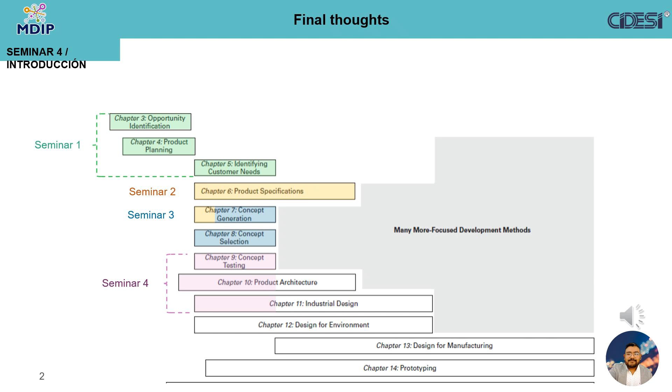Without a doubt, we've come a long way through these four seminars. Between successes and failures, we've embraced the methodology proposed by Ulrich and Eppinger for new product development. Each of these seminars has provided us with lessons and paradigm shifts that have allowed us to conceptualize and refine our concept, transforming an initial idea into something much more solid and meaningful. Throughout this presentation, we will address our interest in the selected opportunity as well as a brief summary of the results of the seminars that allowed us to arrive at our final concept.

In Mexican households with an average of 4 inhabitants, it is estimated that around 150 liters of water are wasted per day due to bad habits, such as leaving the water running while waiting in the shower or during activities such as washing dishes and clothes.

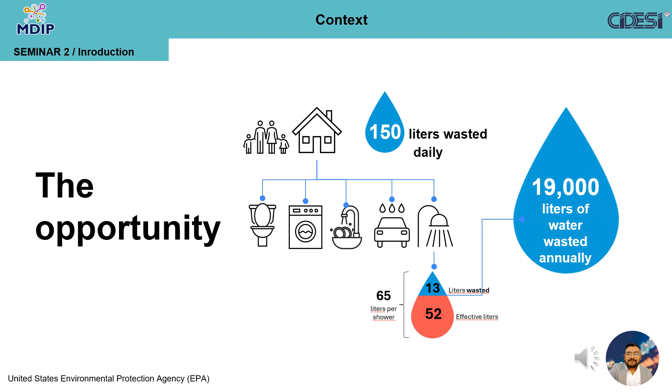According to the EPA, approximately 20% of the water used in a shower is wasted while the user waits for it to reach the proper temperature. Since an average shower consumes about 65 liters of water, this 20% is equivalent to about 13 liters per shower. In a household of 4 people, this waste could add up to almost 19,000 liters of water per year.

During Seminar 1, and based on the methodology described in the book on design and development by Ulrich and Eppinger, we were able to establish the mission of our product, which has guided us throughout our development: modernization of the shower system for homes, for installation in the exposed piping of the existing shower system, reducing the time it takes for hot water to flow when opening the faucet to start the shower, reducing water consumption, and offering an efficient, adjustable, and comfortable flow.

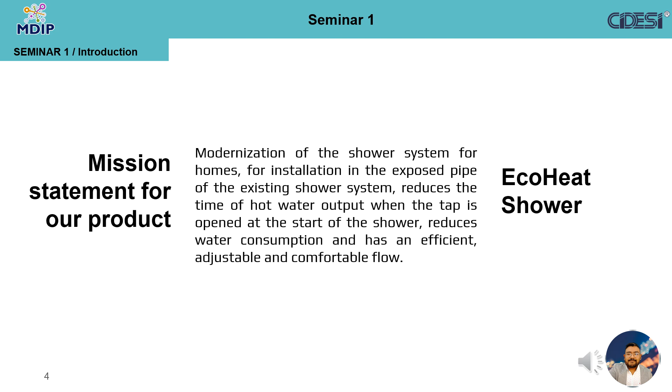We have kept this description in mind throughout the seminars. However, as we will see throughout this presentation, some of our design decisions have slightly deviated from the initial scope.

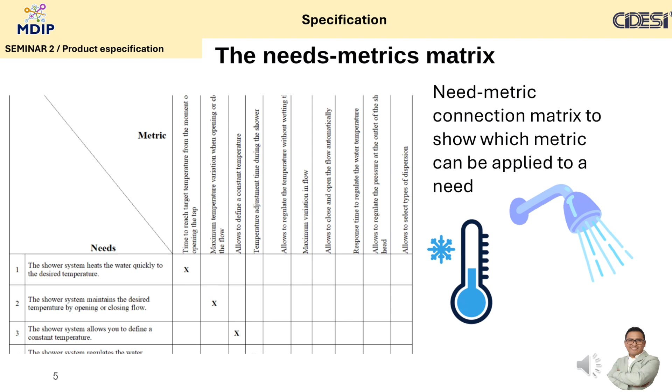In Seminar 2, we defined the final list of needs by assigning each one a level of importance. We also generated the metrics applicable to these needs, for which it was necessary to conduct a study to determine which metrics would be appropriate to validate and certify our product.

At this stage, we conducted research on existing products in the market that could be direct competitors to our project. For this reason, we initially sought to avoid biases by carrying out in-depth research considering different features, functionalities, prices, etc. In this stage, we also compared each product with a list of metrics and needs in order to determine which product was the best in the market and to establish a reference point for our own product.

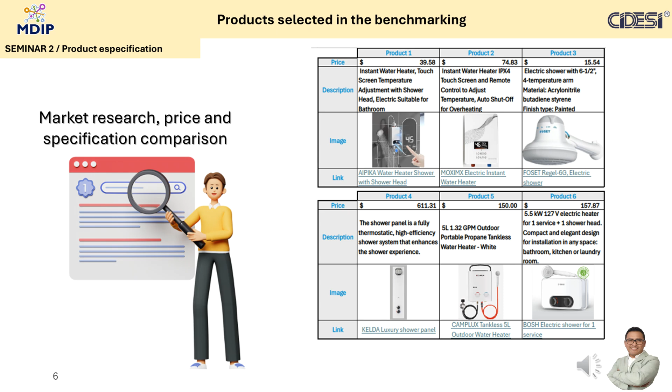In the patent search process, we followed the instructions shared with us by the professors. First, we described the invention. Then we identified the relevant classifications, reviewed the definitions of these classifications, and subsequently carried out the process of searching, selecting, reviewing, and referencing using the CPC. We also conducted the search in Google Patents and Espacenet.

In the search, we identified very interesting patents, and one of them described our problem: avoid wasting cold water before hot water comes out. This process helped us identify both positive and negative aspects, and carrying out the development allowed us to identify opportunities to improve existing developments, avoid risks detected in the developed patents, protect our innovation, gain a visualization of the problems being solved, and most importantly, obtain an overview of how we can meet our clients' needs.

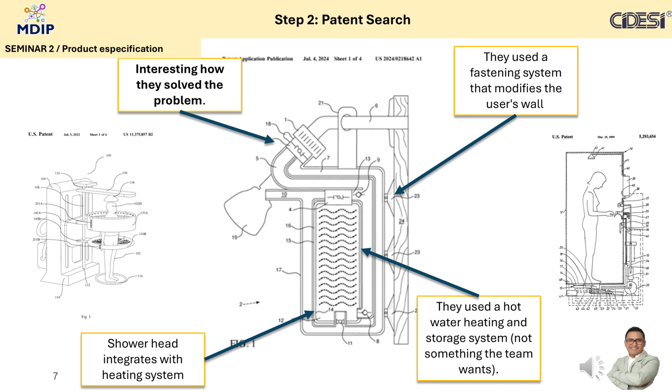Once we obtained the target specifications and defined the marginal and ideal values, we proceeded to carry out the clarify the problem stage. This process was a challenge for us, as it was not very simple to perform with our product. The problem was decomposed into subproblems in such a way that we carried out the three indicated decompositions: functional decomposition, user sequence decomposition, key user needs decomposition.

At the end of this process, we obtained the 4 critical subproblems that would be addressed. This process helped us to visualize the complete product, design and develop each function independently, prioritize functionalities, and establish the logic in the user sequence.

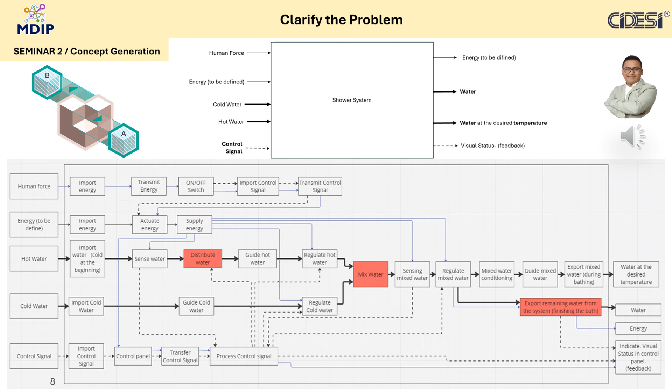These are the critical subproblems we've identified and will address throughout Seminar 3.

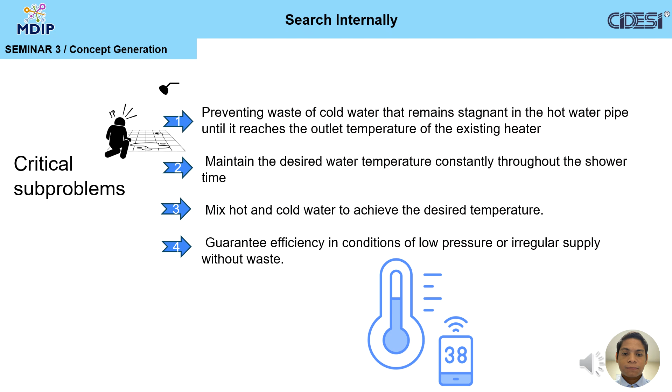We met as a team to conduct an internal search, using our individual and group knowledge of the project to generate ideas. It's important to mention that we sought to be as creative as possible during our brainstorming sessions, tailoring the information to each subproblem.

During this third stage of seminar, an internal search was carried out using different strategies to identify ideas, such as creative role-playing. Some ideas generated in this stage are presented, including intelligent designs incorporating motion sensors and different water mixers.

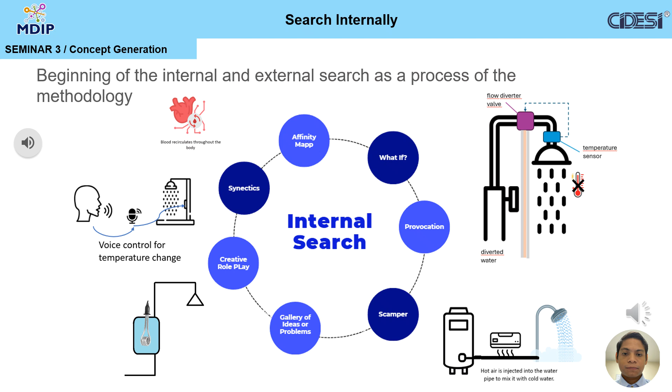The external search was carried out in order to explore what already exists in the market or is in development, such as patents to improve our concept, like the method to empty our system of water over its circulation.

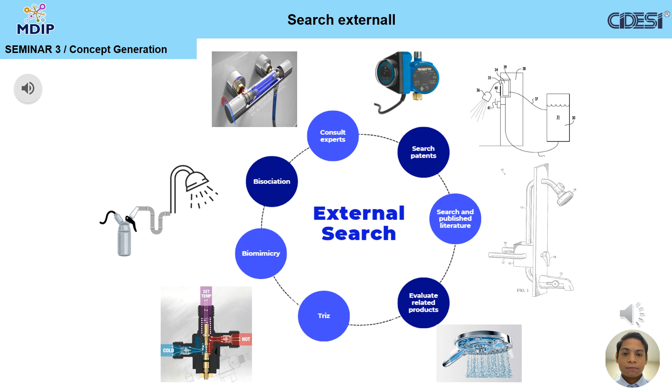In the first stage of Seminar 4, the multi-voting process was carried out within the team to select the final concept. We should highlight that the winner of this multi-voting was different from the last options in Seminar 3, because the previous concepts did not have the necessary potential to move forward.

It is important to mention that the team carried out an evaluation of Concept 7, which had been selected in Seminar 3. By using the mentioned process and analyzing the professors' and thesis advisors' comments, Concept 14 was selected, a system that has a stored water tank, recirculates the water, and uses a thermostatic mixing valve with infrared sensors and automatic pressure pumps to maintain pressure.

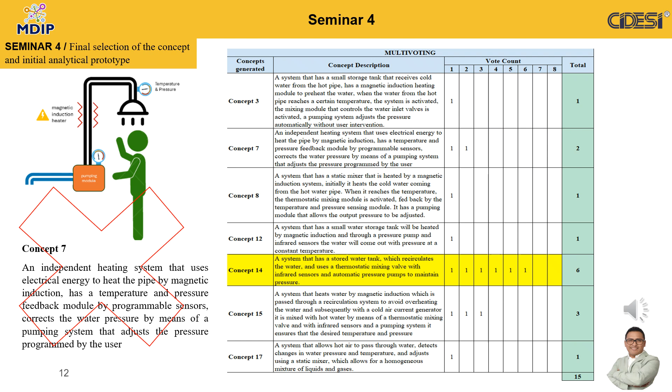It is important to note that this concept was later improved. The selected concept was Concept 14, which already includes a water storage tank to collect the cold water standing in the hot water pipe. This cold water is later pumped to a mixer for recovery, ensuring the tank is always empty and available to temporarily store cold water from the hot water pipe.

It is important to mention that in this process, we also carried out calculations for the tank size, the pump's energy consumption, and the battery's energy consumption and capacity.

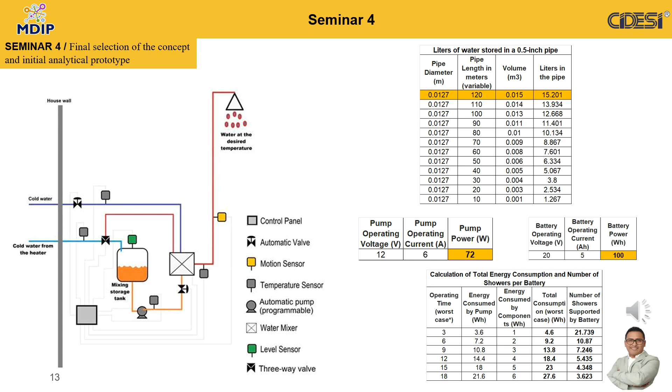The strategic decision to focus on the C segment is based on a precise alignment between the characteristics of this market and the value proposition of our product. We decided to target this segment for reasons such as purchasing power and willingness to invest in added value, appreciation for quality, durability, and design, and interest in innovation, sustainability, and efficiency.

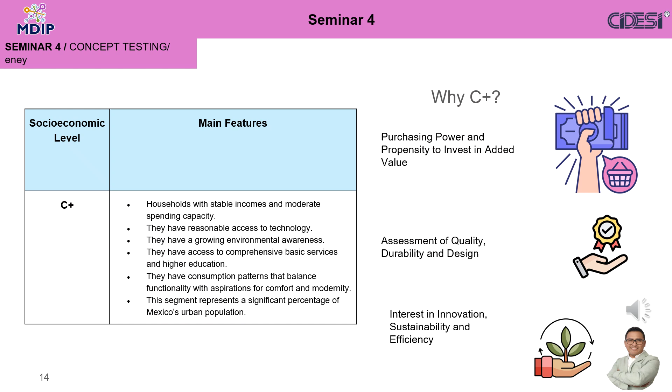In this stage of concept testing, we selected the survey format and decided to conduct it via video conference. We considered the possibility of biases and how to mitigate them. For this reason, we decided to create a concept in SolidWorks and present it to the interviewees.

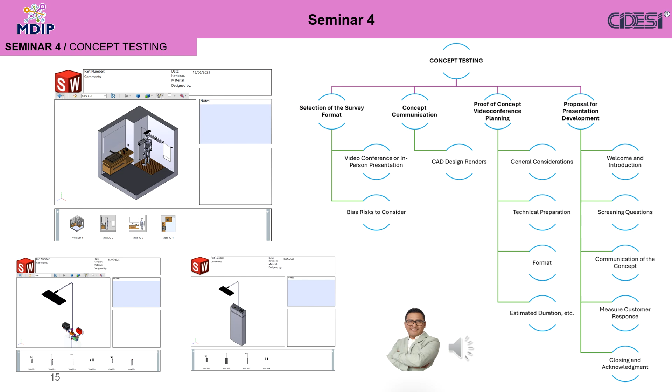Afterward, we developed the plan for the video conference interviews. It is important to mention that these interviews allowed us to gain deeper insight into users' reactions, and their feedback provided us with significant value.

In the following report, we decided to create a YouTube video about the operation of our product and share it with the interviewees. Through Google Forms, we generated a series of questions to obtain more feedback on the concept. It is important to mention that the reception of the video was very positive, and the feedback helped us measure their responses.

Afterward, we measured the users' responses, obtaining very interesting insights such as genuine interest in the product, attraction to water savings, some concerns about the complexity, size, and possible cost of the system, and most importantly, their willingness to change their current system due to the severe water shortage in Mexico. We presented the data and graphs, and in a more visual way, we saw that the greatest interest lies in avoiding water waste.

Moreover, even though the price could be high, it would be compensated by the water savings given the current water crisis.

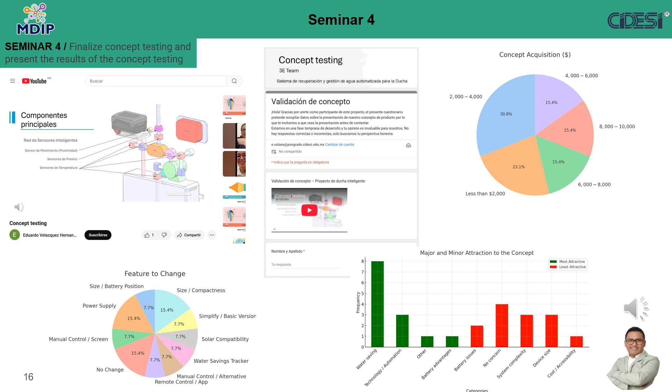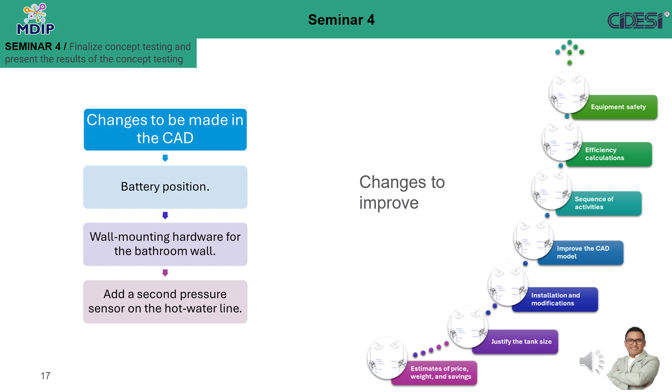Finally, these results represented an opportunity for improvement for us, where in the next steps we would place greater focus. Here are some examples: position and size of the battery, water consumption, mounting hardware to the bathroom wall, adding a second pressure sensor for the hot water line, and temperature level measurement, among others.

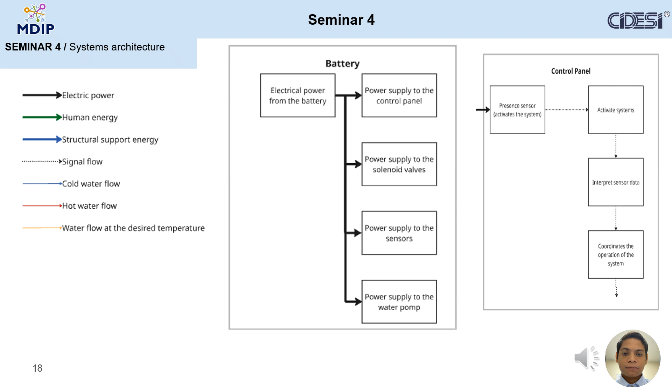During the process of developing the architecture of our shower system, we went through a series of stages that not only allowed us to technically structure our design, but also forced us to deeply reflect on our decisions, correct errors, and learn to interpret the feedback we received. The first step was creating the diagram where we represented the flows of materials, energy, force, and signals. This forced us to understand the system from a functional perspective, rather than simply considering it as a set of components. From there, creating the diagram where elements were grouped into functional subsystems allowed us to more clearly visualize the internal relationships, optimize the system's organization, and anticipate future tasks such as assembly, maintenance, and validation.

As a fundamental part of the development of our system, a detailed bill of materials was created. This list not only identifies each of the components required for proper operation, but also allows for precise control of costs, technical compatibility, and manufacturability. The importance of this list lies in the selection of materials based on the following criteria: thermal and corrosion resistance, mechanical compatibility between components, availability in the domestic market, cost-benefit ratio, and overall material efficiency.

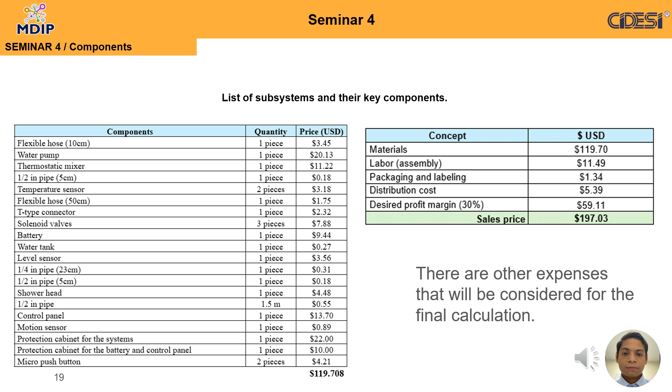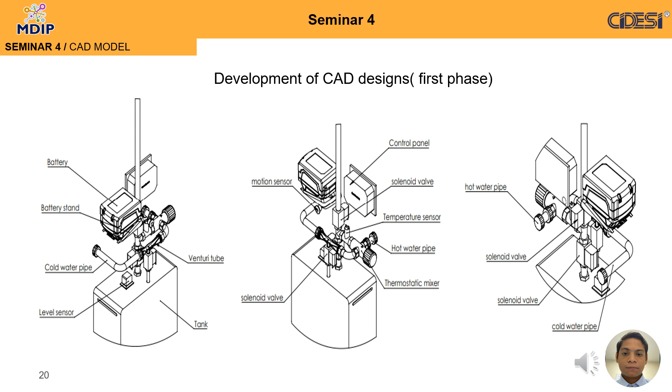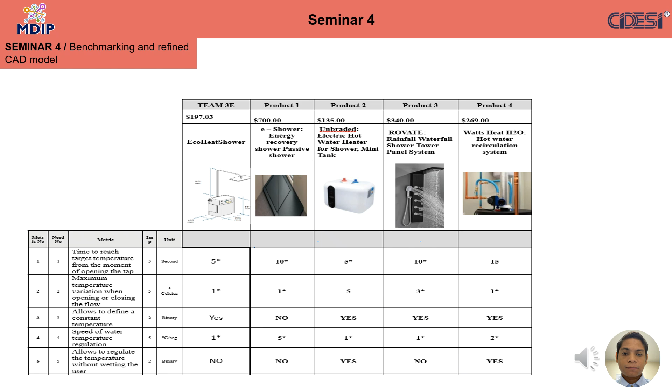At this seminar, we conducted a second phase of competitive benchmarking, a fundamental process for validating our product concept. This analysis was conducted with a new approach, as the evolution of our concept required a re-evaluation of the competition. The methodology remained focused on key user needs and established technical metrics, allowing us to update our value proposition and ensure its competitiveness in the market. This process allows us to know our competition's prices and characteristics, as well as how they try to meet user needs.

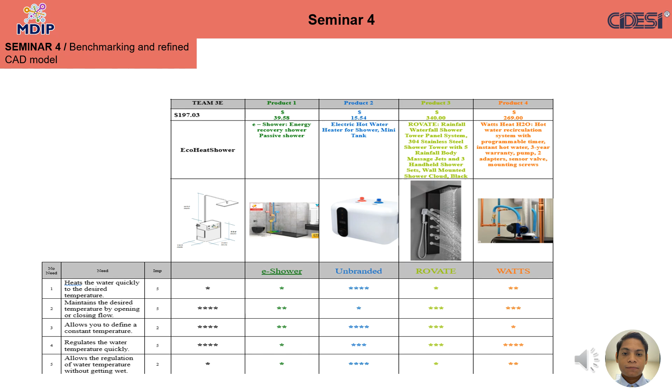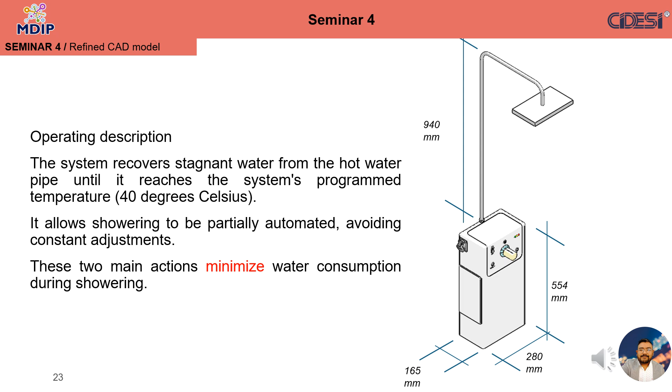Operating description: the system recovers stagnant water from the hot water pipe until it reaches the system's programmed temperature of 40 degrees Celsius. It allows showering to be partially automated, avoiding constant adjustments. These two main actions minimize water consumption during showering.

The exposed elements of the system are the following: the electric charging center, the interaction components, a main access to the cabinet, connections with flexible hoses for its installation, and a shower head is also incorporated.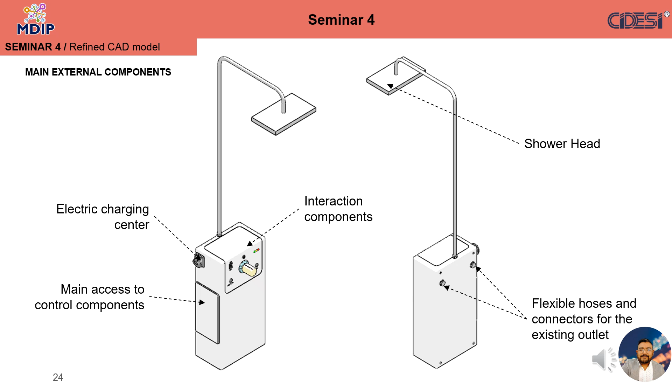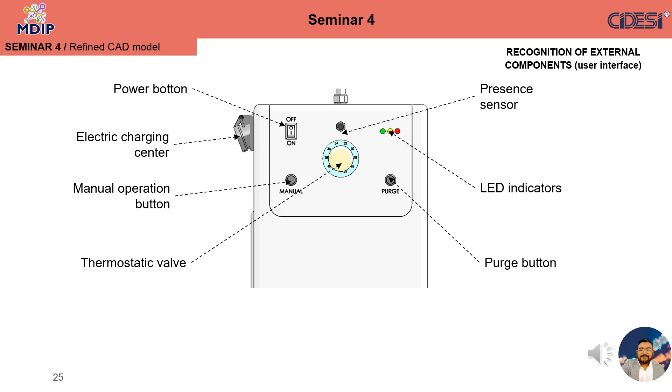The system has the following components as a user interface: a power button to energize the system, an electric charging center for recharging energy, a manual operation button, and another to recover water from the hot water pipe, a thermostatic valve with a temperature selection handle, a presence sensor, and LED indicators that allow viewing system status changes.

Below are the internal components: three solenoid valves for internal water flow control. The first is used to divert water to the tank. The second supplies hot water to the thermostatic valve, and the third releases the mixed flow.

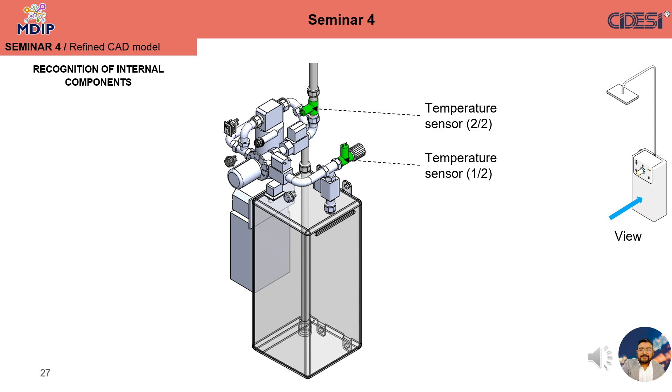Two temperature sensors monitor the different temperatures of the water in its path. The first monitors the change in temperature of the water coming from the heater, and the second monitors the mixed water. A presence sensor that, together with the manual button, activates the water mixing solenoid valve.

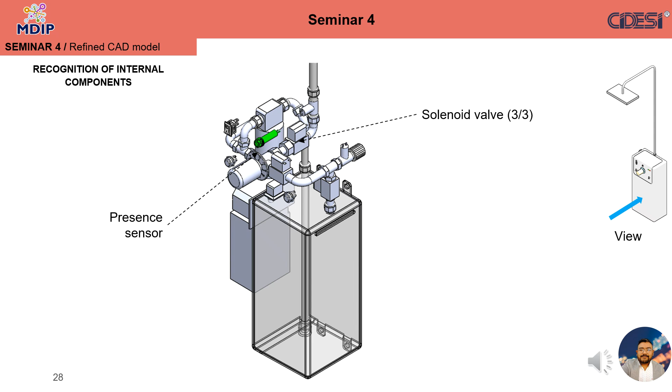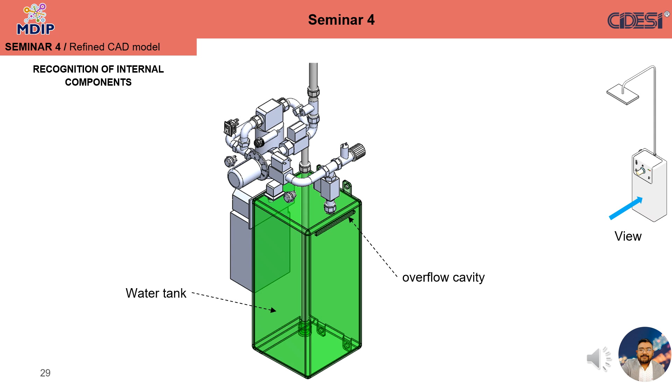A tank for storing recovered water. As a precaution, the tank has an upper cavity that allows overflow in case the level sensor fails.

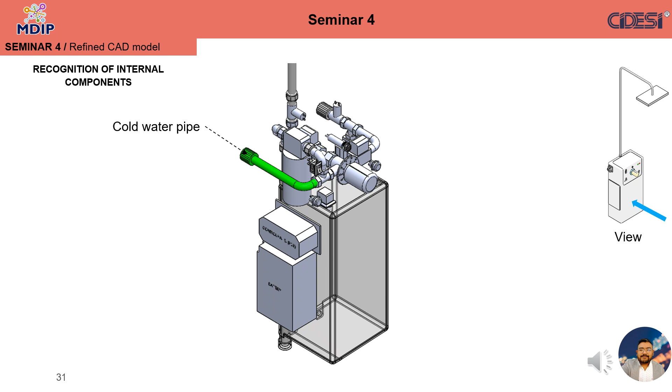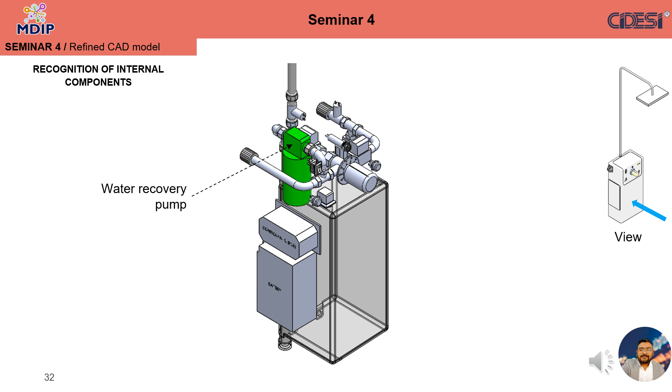An internal pipe that connects to the existing hot water pipe. An internal pipe that connects to the existing cold water pipe. A water recovery pump that allows the stored water to be integrated into the cold water flow of the system. A level sensor that allows monitoring the water level inside the tank. The electronic control card to control the system logic. A battery that supplies power to the different elements of the system.

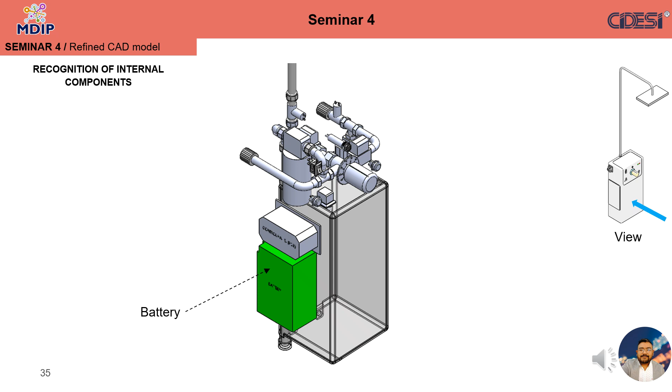Before energizing the system, it is preferable for the user to select the desired temperature using the thermostatic valve handle. This allows the valve to be prepared for mixing the water through mechanical thermal reactions. It should be noted that at this point, the remaining water in the hot water pipe is at room temperature.

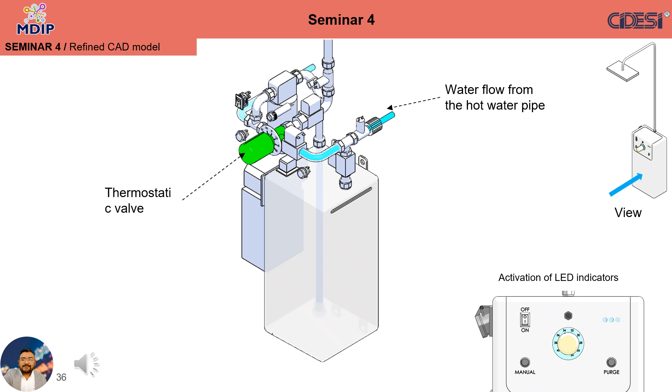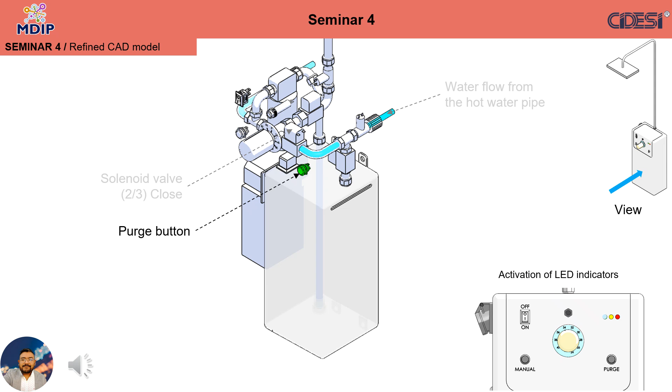After selecting the temperature, the system must be energized. The red LED light turns on. At this point, all valves remain closed. The purge button must be pressed, which allows solenoid valve 1 to open and allows the passage of water to the recovery tank. At this moment, the yellow LED is activated and flashes.

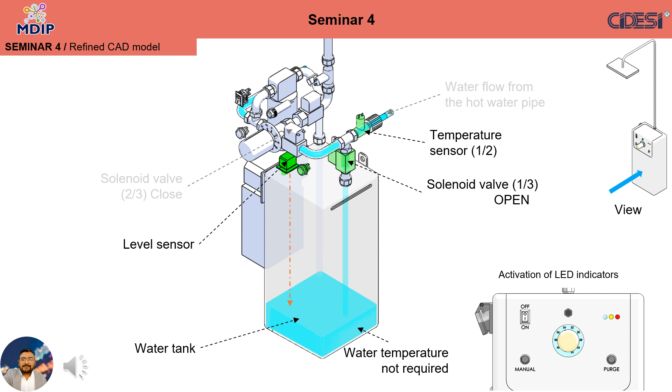During the flow of water, temperature sensor 1 detects the temperature change. The system is equipped with an ultrasonic sensor to measure the water level in the tank, allowing it to determine how much water is stored. This sensor provides feedback to the water pump to determine when to stop.

As the stagnant water is purged from the hot water pipe, it is collected in the system tank. Using the level sensor, it is possible to determine the amount of water recovered. During the water flow, temperature sensor 1 senses the change in temperature.

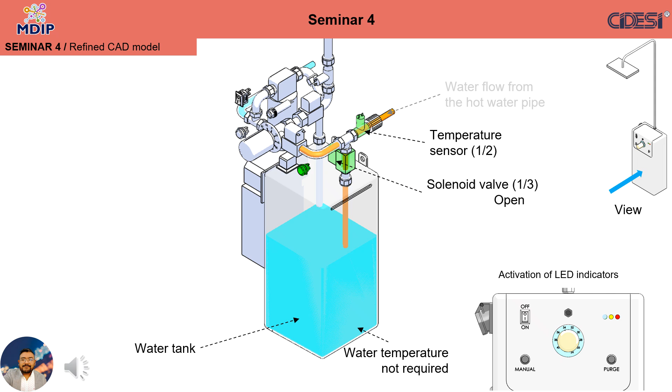When reaching a temperature of 40 degrees Celsius, 104 degrees Fahrenheit, solenoid valve 1 closes. This allows hot water to flow to solenoid valve 2, and the yellow LED stops flashing and remains fully illuminated. At this point, the user is recommended to press the manual activation button.

This will open valves 2 and 3. After this, you must wait at least 5 seconds. This same action can be performed by bringing your hand close to the sensor and leaving it there for 5 seconds.

When solenoid valves 2 and 3 are opened, water is allowed to pass through the thermostatic valve, and the stagnant water in the tube that reaches the shower head is released. The green LED will only light up when the system distributes water to the shower head.

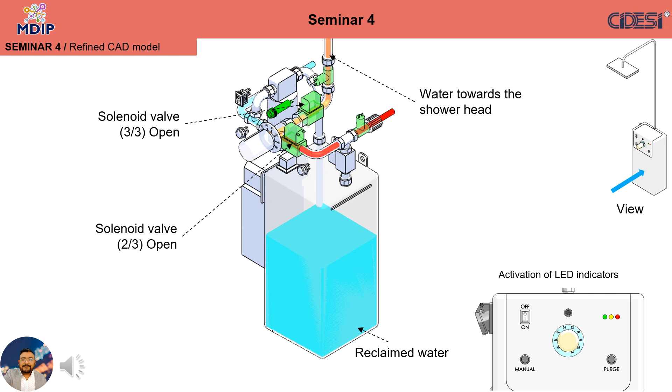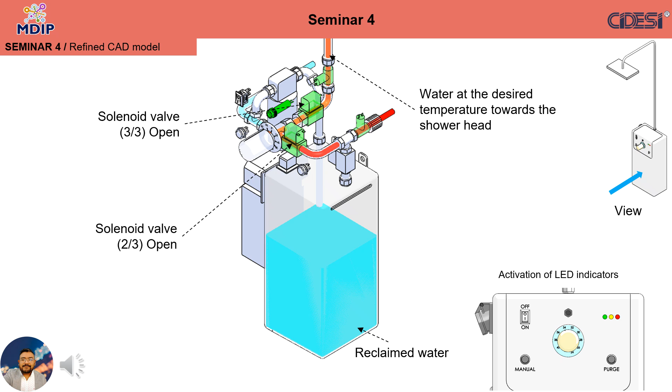From this point onwards, the opening and closing of solenoid valves 2 and 3 will be activated by the presence sensor, and the LED light turns on. The system normally operates as a commercial thermostatic mixer does.

To integrate the recovered water, the system incorporates a water pump to extract water from the tank. The water pump is activated automatically and intermittently throughout the operation of the system, which allows the recovered water to be integrated into the cold water line.

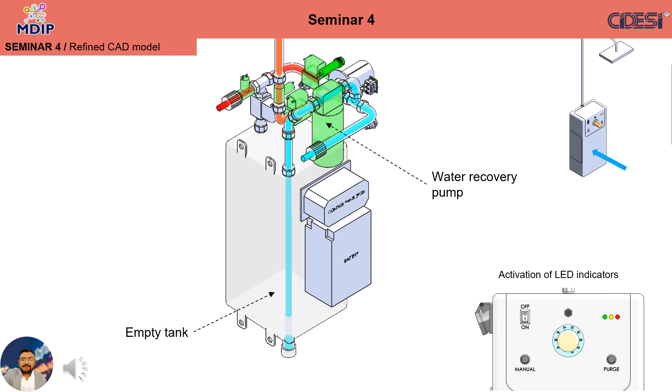Remember that the level sensor provides feedback on the operation of the water pump. The water pump capacity and level sensor measurements cause the water pump to stop when the tank is empty, in approximately 1.5 minutes. The user continues with his shower activity by activating the system using the proximity sensor.

When finished, you must turn off the system. This de-energizes the solenoid valves and closes them until their next use.

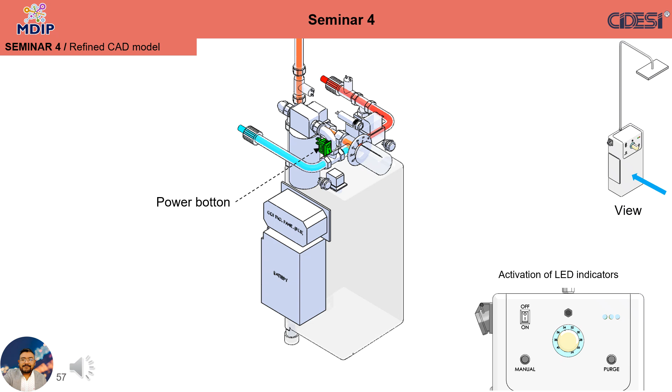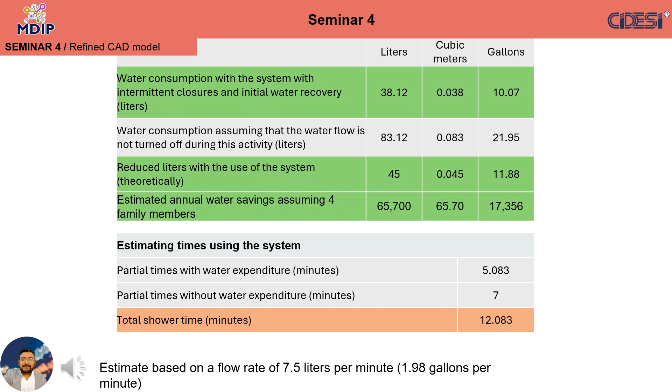Using the system with intermittent shutoffs and initial water recovery reduces consumption from 83.12 liters to 38.12 liters per shower, generating a theoretical saving of 45 liters. In a family of 4 people, this represents an estimated annual saving of 65,700 liters, equivalent to 17,356 gallons.

With an average system consumption of 4.57 watt-hours per shower, the 240 watt-hour battery allows for up to 52 showers before needing to be recharged. For a family of 4, the battery offers an estimated runtime of 13.1 days before needing to be recharged.

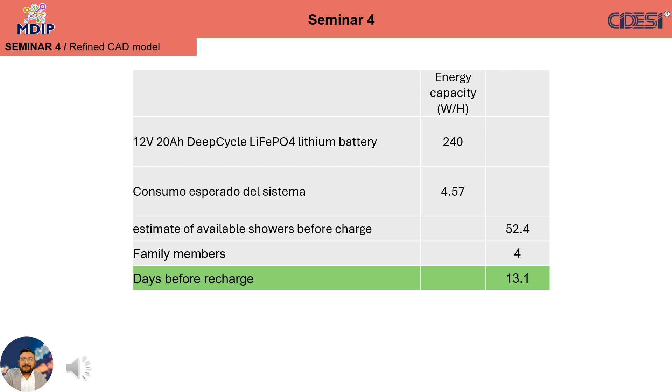Conclusions. This seminar was a very important challenge for us, where we decided to focus on ensuring the functionality of the concept and fulfilling our mission statement, which is to reduce water waste while reaching the desired temperature.

We agreed that an important next step will be to calculate the manufacturing and commercialization costs to ensure the success of our concept. It is important to mention that, as a team, we have very positive expectations for our product.

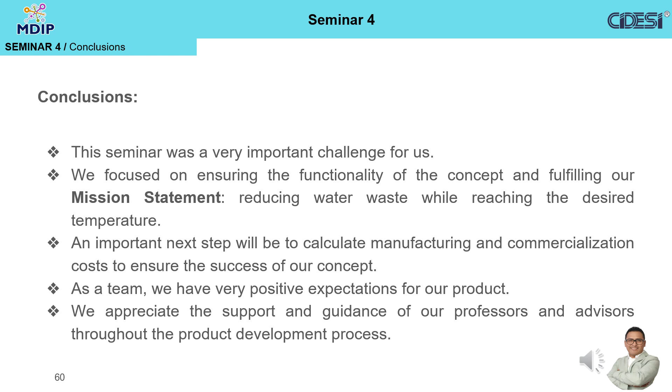However, this choice was made by following the process outlined in the book and with the support of our professors. Currently, water scarcity is a critical issue in Mexico, and for this reason, important actions are required to ensure responsible consumption and to raise awareness among Mexicans to avoid waste.